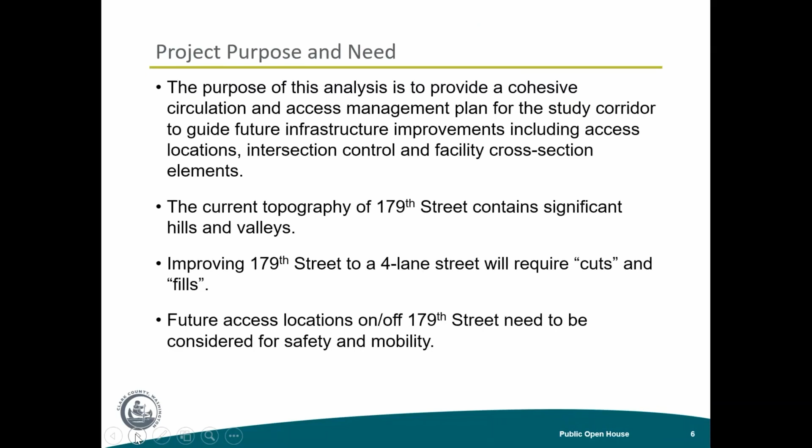The intention of this is really to provide a safe and predictable transportation network that's well connected. We want that well-connected network so that it's both resilient and provides efficient multimodal corridor options. The study corridor is 179th Street from Northwest 11th Avenue to Northeast 50th Avenue.

This is inside the Vancouver urban growth area with urban zoning designations. A lot of the large lots that exist out there today have not redeveloped because an urban holding overlay existed on those properties from 2007 until 2020. So we're really on the cusp of redevelopment of the neighborhood, and we want to make sure we have a local transportation system that's planned, as well as a 179th Street corridor that can move all users, both pedestrians, bicycles, and drivers, both freight and vehicle.

Here's the history I mentioned previously: added in 2007 to the Vancouver UGA, and the urban holding removal was in 2020.

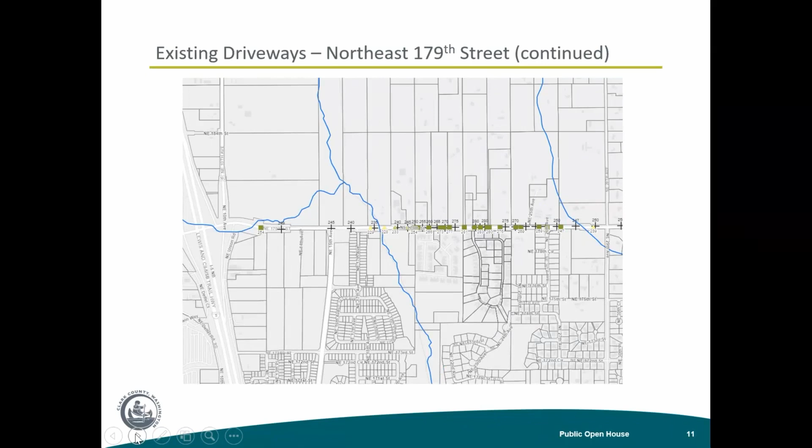Here's the existing driveways on 179th Street shown on this map, all the way to 50th Avenue. It's important to accommodate folks and make sure they have safe locations for entering and exiting 179th Street and are connected to a local street network.

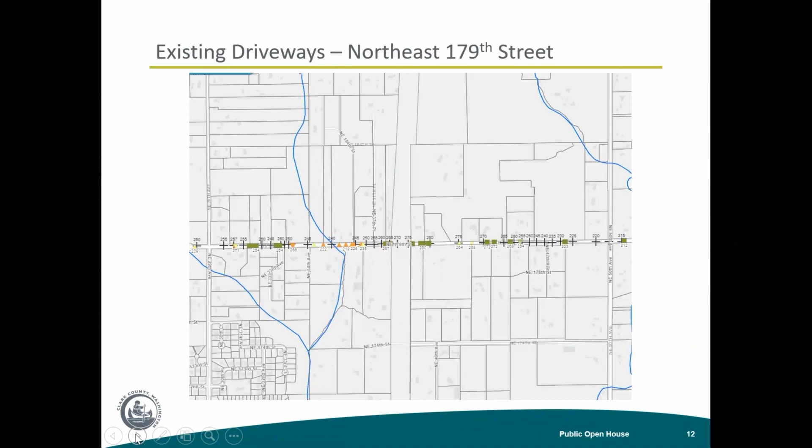The grades on 179th Street are significant, as there are several hills right now that teenagers love to drive over. We want to be able to curb that and make sure it's a stretch of road that's not as hilly and doesn't have the significant hills and valleys that currently exist.

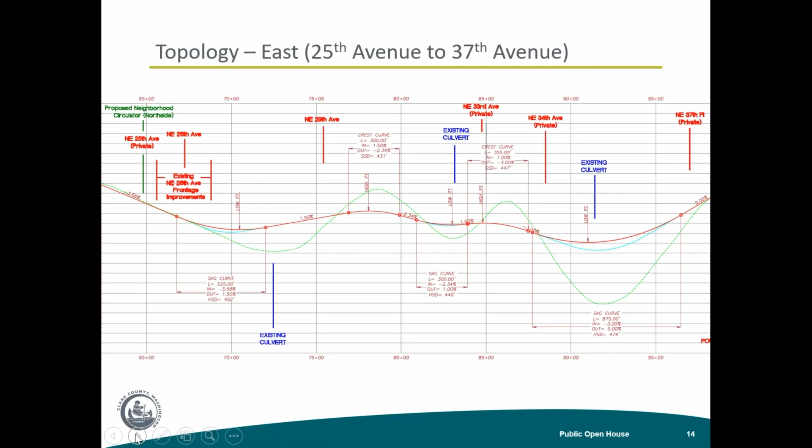Here's the topography from 25th Avenue to 37th Avenue, and the BPA right-of-way to 50th Avenue.

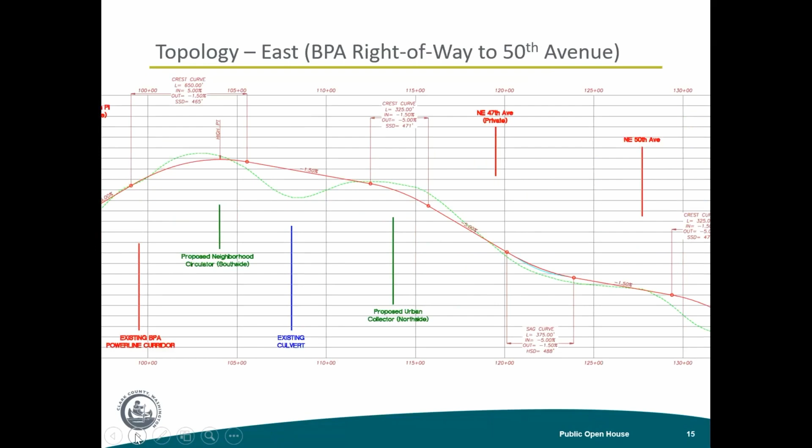We had a question on the Q&A about environmental constraints. This was important to us as we considered the local road network. What we want to do when we plan for the local road network is make sure those future streets are on property lines so that the future cost of those local streets is shared equally by developers. It was also important for us not to impact future streams or wetlands. So you'll see on our plans our avoidance of those wetlands north of 179th, about midway between 11th Avenue and Delphi Road.

Here are the stream crossings and wetlands between 29th and 50th Avenue. We have a significant stream crossing as well as some wetlands in that section.

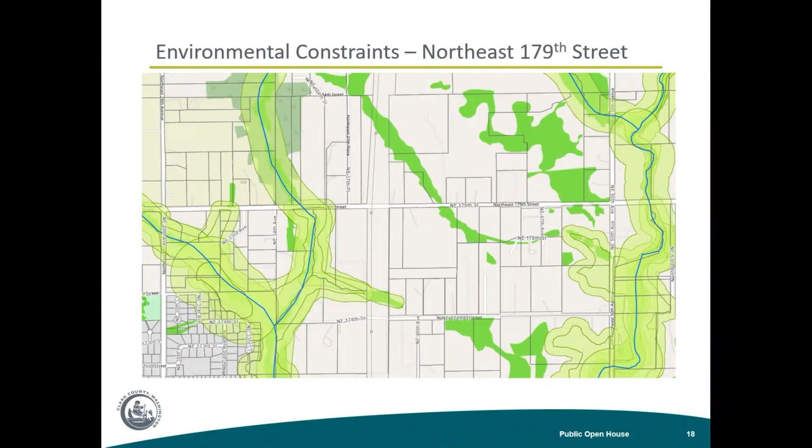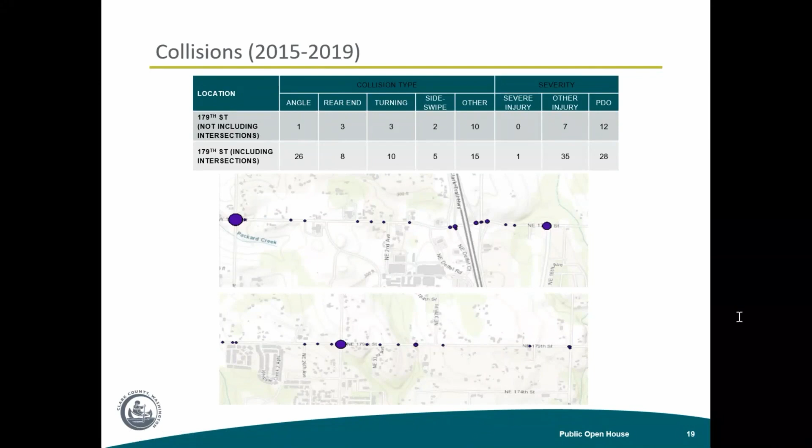Crashes at intersections are most severe and occur more often at intersections. Therefore, having special attention for intersections is critical to provide a safe facility and safe transportation environment for all users.

There was a question in the chat regarding Northwest 179th Street from Northwest 11th to the interchange. When the county council removed the urban holding overlays, that was added to the CFP at that time. It did not identify the intersection types. We are identifying the intersection types on this plan, and that plan is outside of the 6-year transportation improvement program, but inside the 20-year capital facilities plan.

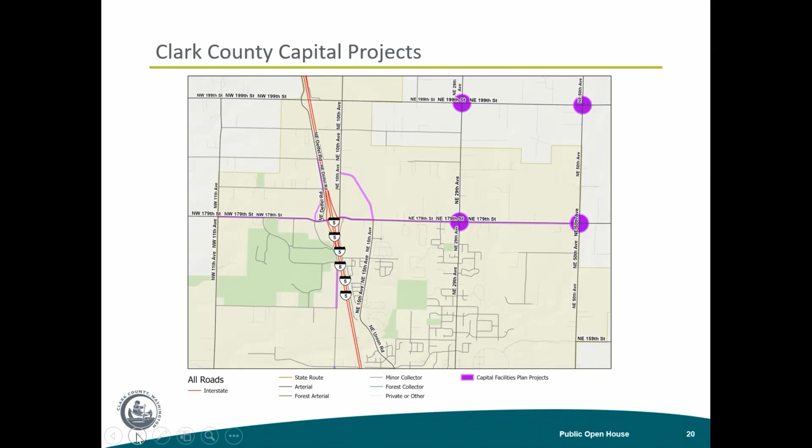Please note, and I want to stress this with utmost importance, that these local streets are built by development. They are not built by Clark County. Clark County is not taking property to build these roads. When development occurs, they are part of the conditions of development. They are a requirement for development to build these local roads.

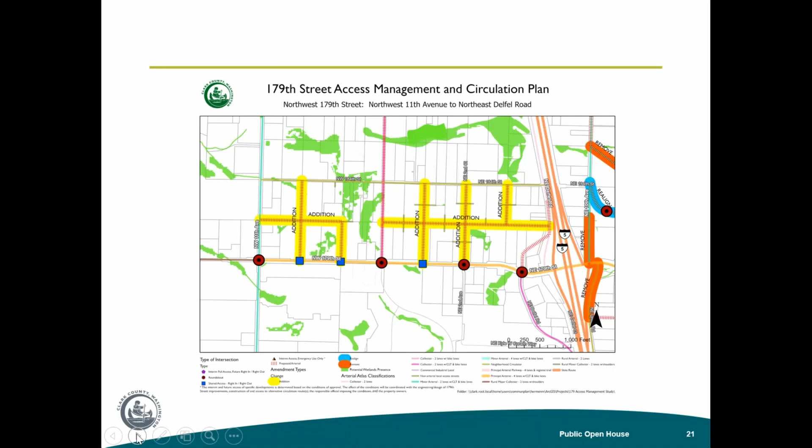Here is the access management and circulation plan from the interchange to 29th Avenue. For the arterial atlas amendments, we want to remove the roads that will be removed as part of the interchange reconstruction project - that's the Union Road disconnection as well as the 10th Avenue connection. The existing 10th Avenue connection will be tied into 179th Street through an extension of 15th Avenue. Here it's shown as a realignment in blue with the old section in the arterial atlas removed.

You're seeing the roundabouts at 12th Avenue, roundabouts at 15th Avenue, and then the emergency access locations only. Those emergency access locations currently have interim access, but they are switched to emergency access only when the local road network is connected to them and 179th Street is built to its full cross section.

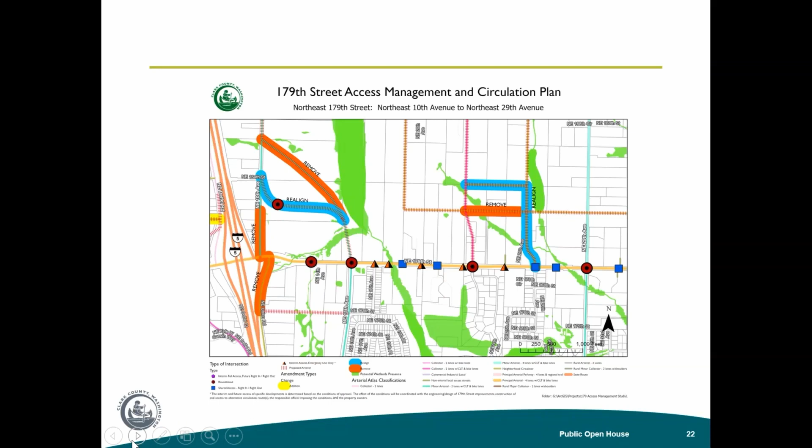A roundabout is proposed at 22nd Avenue. This is at the top of a significant hill there that provides the greatest sight distance. We want to remove a future neighborhood circulator that crosses a wetland, shift it north to the property line so that it avoids impact to that wetland.

Here's the plan from 29th Avenue to 50th Avenue. You're seeing the roundabouts as the red circles, right in, right out as blue, and the emergency access locations as the orange and black triangles. We want to add a neighborhood circulator that connects at approximately 35th Avenue, 33rd Avenue, which is just to the east of 29th Avenue, connecting to a future neighborhood circulator running east-west.

We want to connect 174th Street, which is south of 179th Street, to 179th Street through a future collector that will tie it into 179th Street with a roundabout. You can also see on this map that we want to avoid east-west roads that cross those wetlands. There's kind of a peninsula there about 37th Avenue that's surrounded by wetlands, so the local road network that ties into this future neighborhood circulator will serve future development in that location and avoid disturbance of those wetlands.

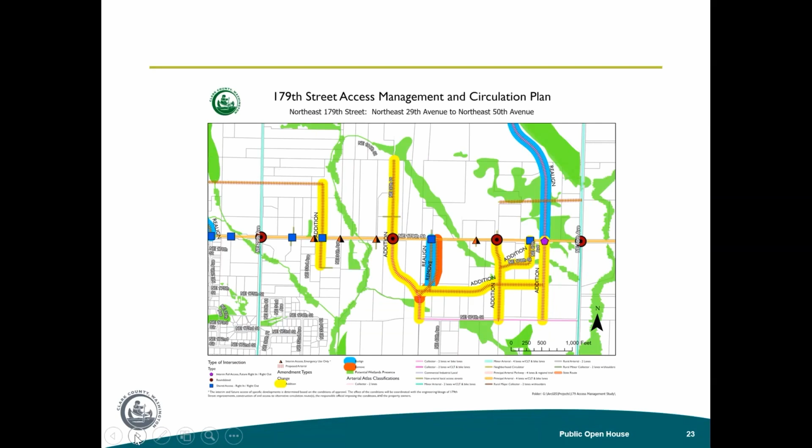We are also proposing neighborhood circulators to be located between 174th Street and 179th Street that will access 179th Street through an additional roundabout at approximately 45th Avenue.

In addition to the vehicle system, we also are proposing walkability connectivity through neighborhoods - those are shown in a very light pink. It's kind of hard to see on these slides, but approximately at the fairgrounds entrance and over to the east, there's a trail system there that we want to connect the neighborhood to the roundabout. Providing safe passages for pedestrians is crucial, as well as making sure pedestrians can access 179th Street through the commercial zoning districts north and south of 179th between Northeast 2nd Avenue and Northeast Delfel Road.

Here's the proposal with the wildlife corridors shown where the current streams are located, and again the same between 29th and 50th Avenue.

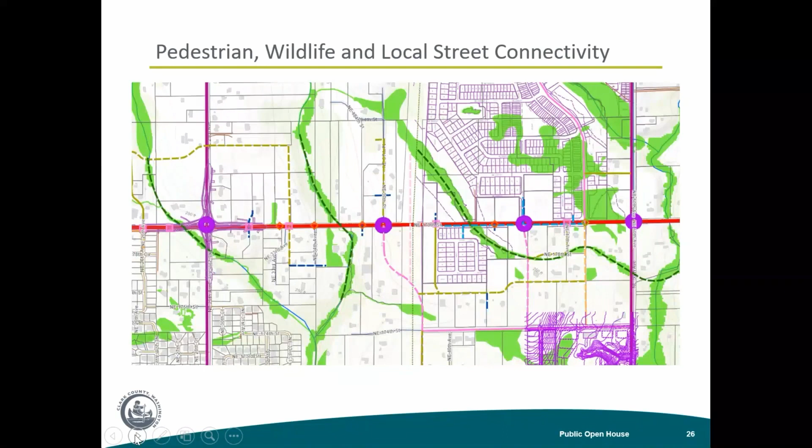Again, the Planning Commission hearing is scheduled for February 17th. It's open to the public, free to comment, free to testify during that hearing, and have the Planning Commission consider your comments in their recommendation process. Their recommendation will then be forwarded to Clark County Council on March 15th, a Tuesday evening. Clark County Council will then evaluate both the DEAB recommendation and the Planning Commission recommendation, as well as residents' comments and concerns, and make their decision.

That's the end of mine. With that said, I'll shift over to Scott Sawyer, who's the project manager for the 179th Street, 50th Avenue intersection improvement project.

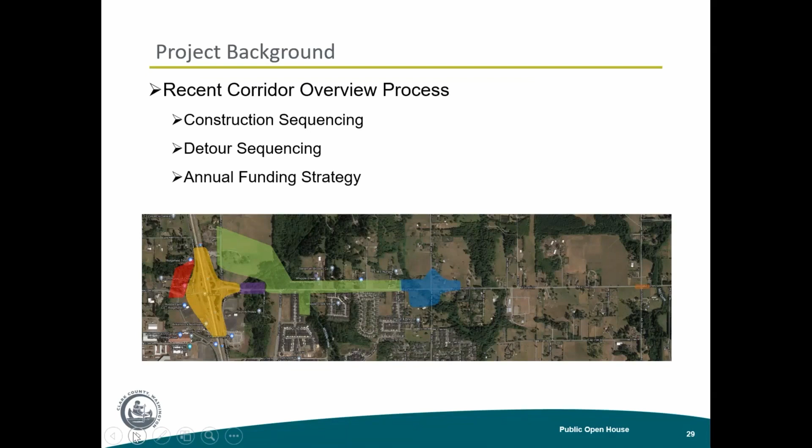We are going to be focusing on the section from 15th Avenue to 29th Avenue, which is the project identified in blue. As we talked about last hour, you're up to speed on the roundabout that will be incorporated at 29th. What we're going to talk about here just very quickly is Northeast 179th and 50th, and our plan for that. So if we can go to the next slide.

Just quickly, I wanted to point out where the intersection is. I think we're all pretty much aware of it. It's about 2 miles east of the interstate. Currently, it's an all-way stop condition. Next slide, if I can.

When we started the project and were heading last fall towards the open houses, our plan was to incorporate a multi-lane but single-lane striped roundabout, similar to what we were focusing on at Northeast 29th Avenue. As we took a step back and looked at the big picture, the decision was made to delay the incorporation of this roundabout at this location.

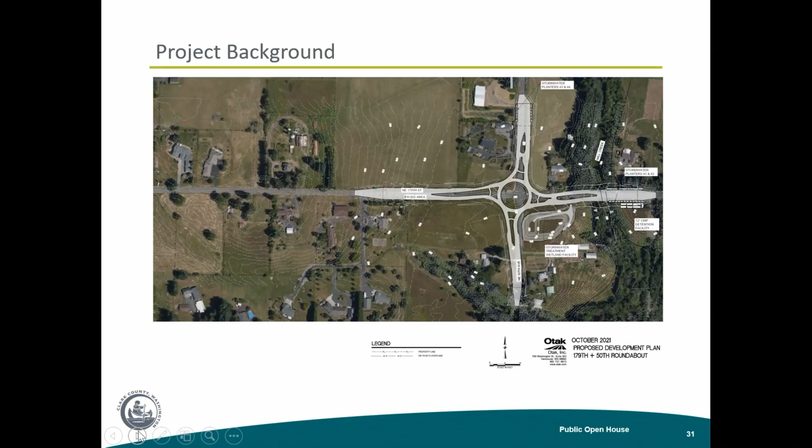Eventually it will need to go in, but if we go to the next slide, what our traffic engineers determined is that by adding left turn channelization, left turn lanes on the east and west leg of 179th where the intersection is at 50th, that is anticipated based on their modeling to operate at an acceptable level of service well into 2035. So the decision was made that rather than spending a considerable amount of money putting in a roundabout now, the money would be better spent moving that closer to the interchange and focusing on Northeast 179th Street over on the west.

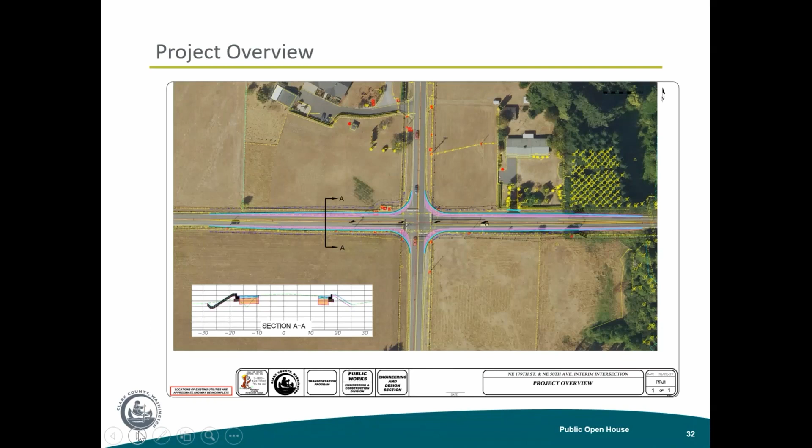Next slide, please. This reiterates that the need for at least those east and west leg intersection improvements is to meet the traffic volumes anticipated in the future with both residential and commercial growth. As I mentioned, traffic studies show we will be able to last well into 2035.

The other thing is, since we're only really focusing on the outside of the existing travel lanes, we anticipate that traffic will stay open at all times during construction. So we won't have to close it down, though there may be times with a flagger or something, depending on the type of equipment. Next slide, please.

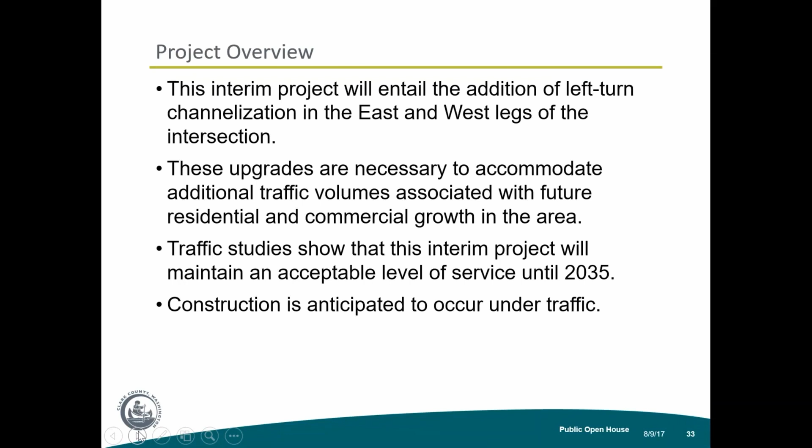This is just a reiteration of what you saw in the last hour. As far as the detour route, while this is under construction, Northeast 179th Street and 29th Avenue will be closed. So we'll see a detour going up 10th, over 199th Street, and then down 50th. But as I mentioned, we will have that intersection open at all times during construction, so that should function okay.

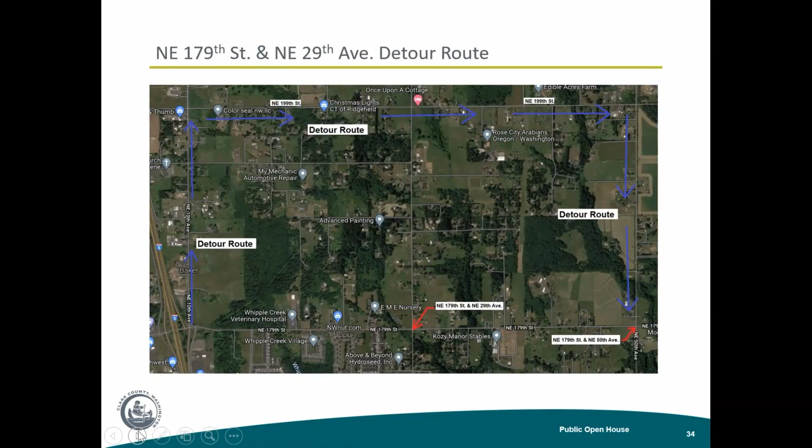Next slide, please. Funding for this one is pretty simple. We're using county road funds since it's a fairly small project. In the future, as we get into the roundabout, we'll be looking for other funding sources, including federal dollars and also traffic impact fees from the development community.

Next slide, please. As far as the project schedule, we hope to start the acquisition process because there are going to be pieces of property we will need to make this work. We hope to start in December of 2022 and wrap that up by December of 2023.

We will have some permitting. There is a small amount of wetlands that we will be impacting, and that will take from July of this year through October of next year. Then we hope to open bids in spring of 2024 and anticipate starting construction in summer of 2024. It's not going to be a very long construction—it should be wrapping up in fall of 2024.